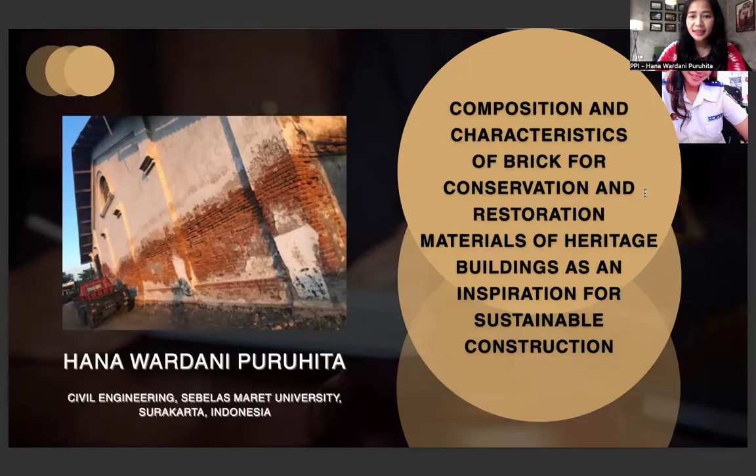I will present my research about the bricks, heritage bricks. The title of my research is Composition and Characteristic of Brick for Conservation and Restoration Materials of Heritage Building as an inspiration for sustainable construction.

Heritage buildings are buildings that have national, historical, and cultural value that are important for the understanding and development of science and culture in the world. So they need to be preserved and managed well. In Indonesia, the Republic of Indonesia Law Number 11 of 2010 concerning cultural heritage was issued.

Article number 77 states that the restoration of damaged cultural heritage buildings and structures is carried out to restore their physical condition by repairing, strengthening, and preserving them through reconstruction, consolidation, rehabilitation, and restoration work, which must take into account, number one, the authenticity of the materials, form, layout, style, and construction technology.

The second is the original condition with the least possible degree of change. The third is the use of non-destructive techniques, methods, and materials. And the last is the competence of the implementer in the field of restoration.

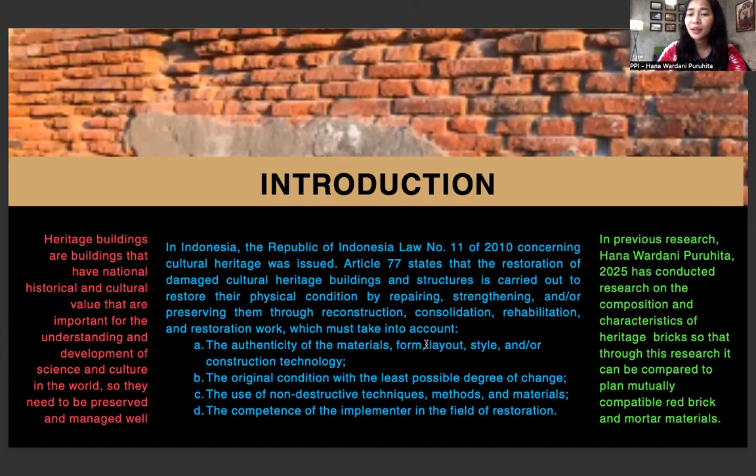In previous research, Hana Wardani Puruhita conducted research on the composition and characteristics of heritage bricks, so that through this research it can be compared to plan mutually compatible red brick and mortar materials.

The method of my research is, first, renewable bricks are made from the best material from various areas in Indonesia, particularly Central Java and East Java, with a minimum of 8 locations, including clay and lime. Renewable brick production is carried out at one of Indonesian brick production facilities to ensure complete equipment and support by

experienced personnel. Laboratory research location: brick characteristic test, laboratory of the Faculty of Civil Engineering, Sebelas Maret University Surakarta, Indonesia; brick composition test, integrated laboratory, Sebelas Maret University Surakarta, Indonesia. Research tools: the tools used are square rulers, calipers, a compressive strength machine, and a practical tool for mathematics and natural science material. Research type and design is laboratory test and experiment.

Research variables: heating temperature is a dependent variable, heating time is a dependent variable, and brick composition is the independent variable. And the last, the analysis technique: heritage bricks that have been lab tested for compressive strength, water absorption, salt content, and physical form are used as a reference in the experimental process of producing renewable bricks.

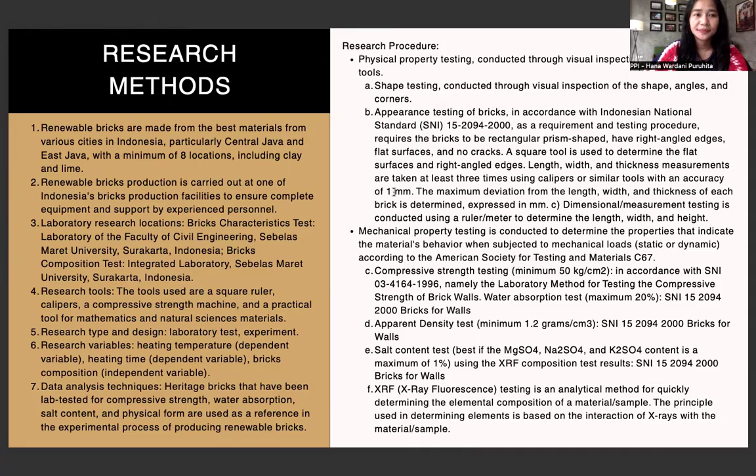And the result is the character of repair brick. Number one is reference data for repair bricks from Hana in 2025. The characteristics of repair brick refer to the physical and mechanical properties of the heritage brick material studied, namely physical properties and mechanical properties.

The physical properties of repair bricks may be based on the physical properties of heritage bricks, namely the shape is a rectangular cube and the dimensions vary for each building and region. Average dimensions are 5.5, 14, 25.5 centimeters. The surface is flat. Angularity is a 90 degree angle. Angularity is sharp.

Appearance color is average of number 2 and 5, and I will give the coloring number, and then conduct a pilot test by taking into account the additional dimension during the manufacture of the solid bricks mold, then calculate the shrinkage rate. The second is mechanical properties.

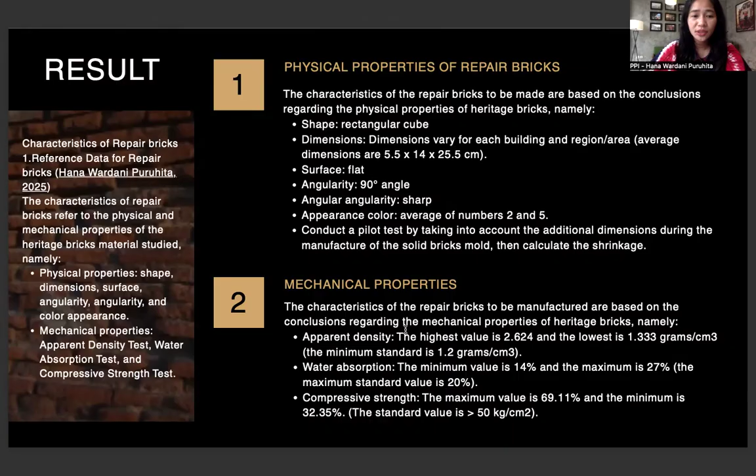2.6 and 1.3. And then the result of number 3, the process of methods: raw materials, pure clay, and then clean water; material processing, soak the clay in clean water for several days, etc.; molding the materials, drying the materials, firing the materials, and final research.

And the result, we can see we have a box for bricks from the wooden mold, make a wooden mold like that. The dimension is 5.5, 14, and 25.5 centimeters.

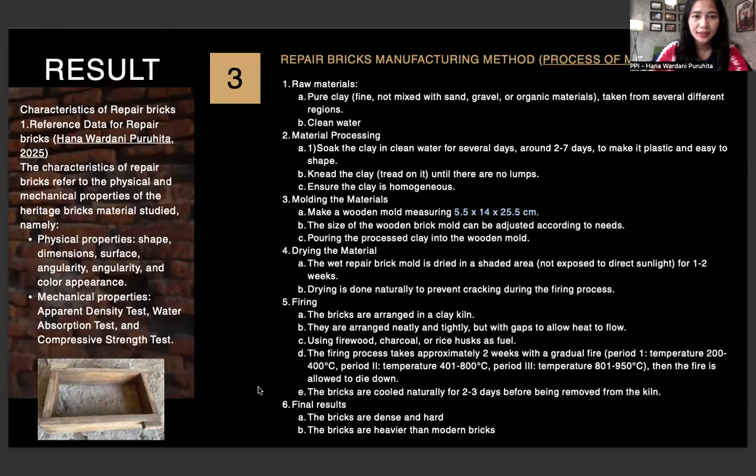And the results, location for selecting clay samples from Karangmalang District, Masaran District, Mojolaban District, Barat District, Jiwan District, Laweyan District, Jaten District, Kedunggalar District. Bricks from different locations have different results, and many bricks have different dimensions because the material is different from many regencies, East Java and Central Java.

So when we get the soil material from different regencies, we have different results. We can see number 1 until 8. Number 7 is the best dimension, the same as the wood.

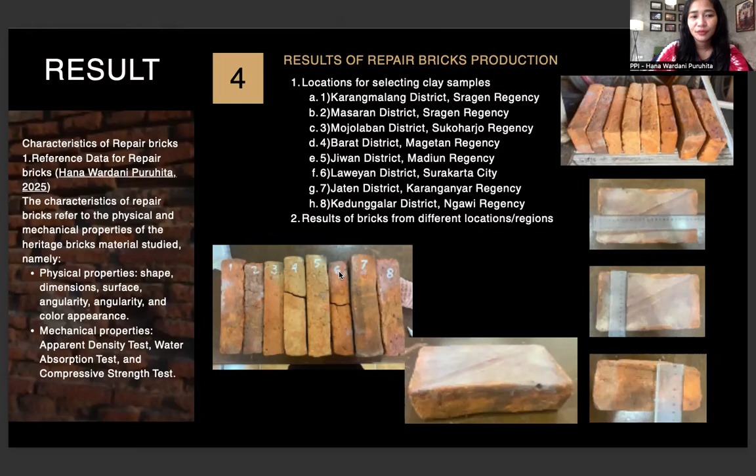Okay. And then physical properties, we can see the color of number 1 until 8. And we have the results for color, shape, dimension, surface, angle, and sharpness. Brick number 1, 2, 3, 4, 5, 6, 7, and 8 have different results of physical characteristics. The shape is all the same, rectangular cube.

And then the dimension is different because of the different materials. We can see number 1 until 8 have different dimensions, and then the surface is all the same, flat, and the angle is all the same, elbow 90 degrees, and then the sharpness is the same, sharp, and the color is different.

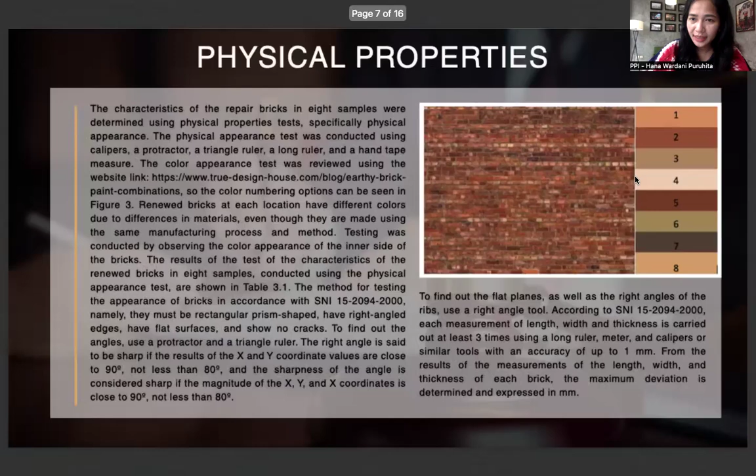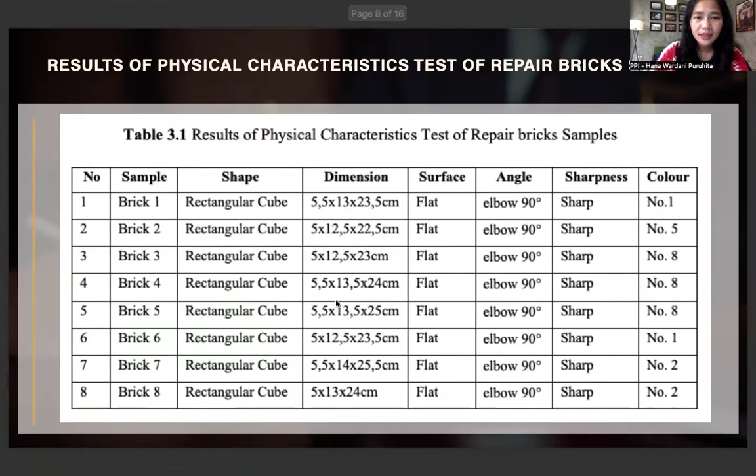Okay. Next, the conclusion of the physical characteristics: based on the visible test result, it can be concluded that from the test of the characteristics of repair brick in terms of physical properties, all repair bricks are rectangular cube shape with different dimensions, even though the materials are from the same region or from different regions.

The dimensions of the repair bricks vary, but there is one brick whose dimension meets the wooden mold, only one, namely brick number 7. All surfaces are flat, 90 degree angles, and sharp corners. Repair bricks have different colors. In the test, 100% of bricks are intact and meet the visible properties test according to SNI 15, Standard National Indonesia.

And the result of the brick size test doesn't meet SNI due to difference in size or dimension in heritage bricks, and there is a shrinkage value seeing the age of heritage bricks.

But brick number 7 is a brick made from clay in the Jaten Karanganyar area with clay conditions that have been left for a long time, namely more than 1 year. Making repair bricks with the same material specification as number 7 doesn't require additional dimension to the mold because there is no shrinkage in size in the resulting repair bricks.

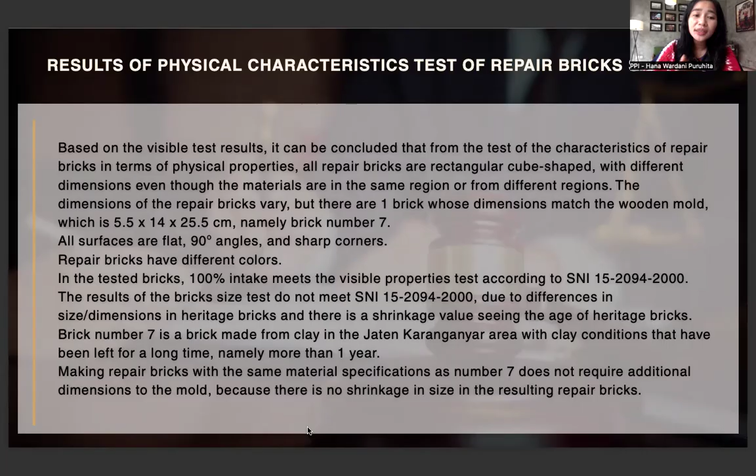So the result of physical characteristics: when we want to get the same size as the wooden mold, we must use the material from Karanganyar, Jaten. Why? Because of the clay condition, it has been left for a long time, namely more than 1 year.

And then mechanical properties, we can see many tests we have. The characteristics of heritage bricks in 10 samples were determined using mechanical properties tests conducted in the civil engineering laboratory, including apparent density test, water absorption test, and compressive strength test, namely ASTM. The results of the heritage bricks' mechanical properties were taken from 3 samples at each location, as shown in tables 3.2, 3.3, and 3.4.

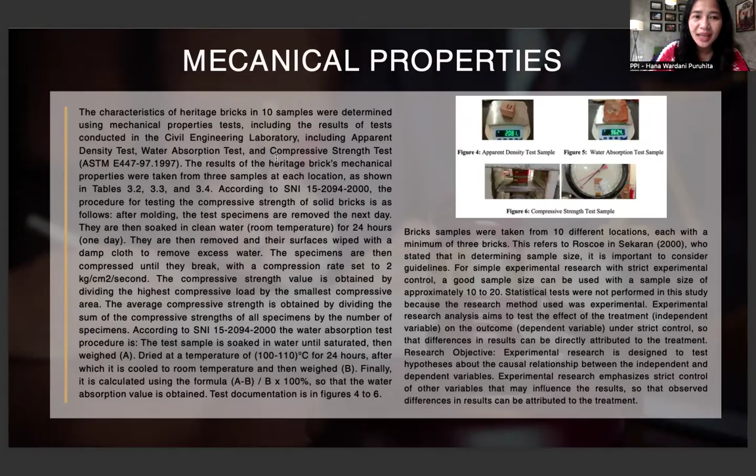And in figures 4, 5, and 6, we can see the tests for apparent density, water absorption, and compressive strength. We can see the results in the table. The apparent density test result for all heritage brick samples meets the requirement of SNI, which is a minimum of 1.2 grams. The highest value was 2.9 and the lowest was 1.7. So we can see at table 3.2 the many samples.

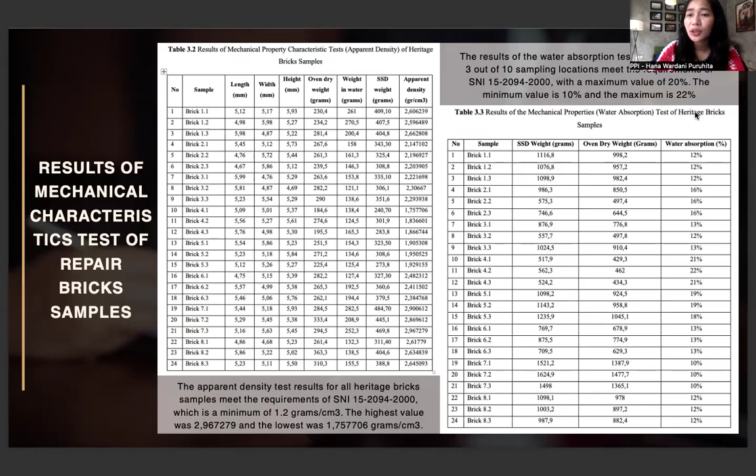And then table 3.3 shows the result of the water absorption test on heritage bricks. 3 out of 10 sampling locations meet the requirement of SNI, with a maximum value of 20%. The minimum value is 10 and the maximum is 22%. And then the last test, the compressive strength test result for repair bricks shows 100% of the values meet the requirement of SNI, with a value of more than 50 kilograms per centimeter.

All good. Based on the test results, it can be concluded that the mechanical properties of repair bricks, namely water absorption, apparent density, and compressive strength, show that all repair bricks have varying values even within the same area. The highest apparent density was 2.96 grams for brick 7. The lowest water absorption was 10% for brick 7, and the highest compressive strength was 86.7 kilograms per centimeter for brick number 7.

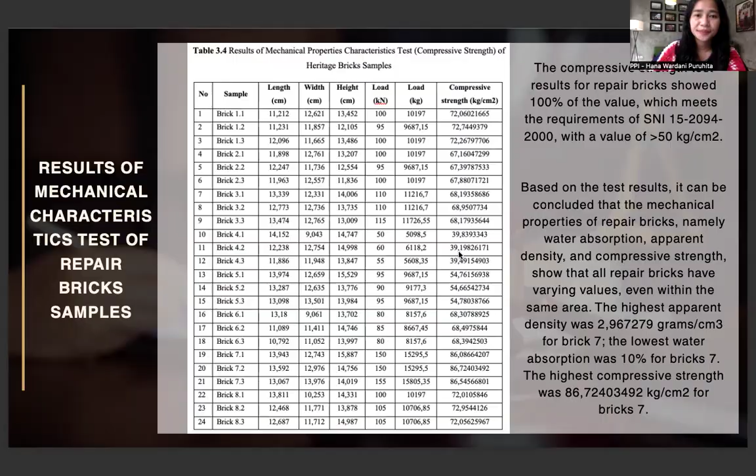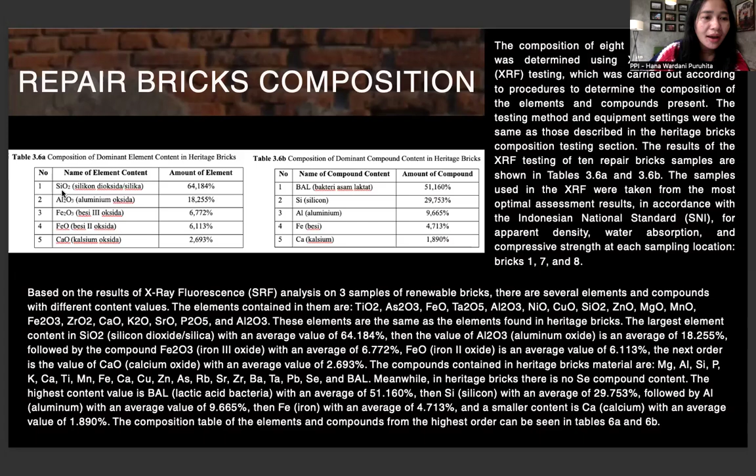Repair brick composition: we can see at table 3.6 the composition of dominant element content and the composition of dominant compound content in table 3.6b. Based on the results of XRF analysis on 3 samples of renewable bricks, there are several elements and compounds with different content values. The element contents are as in the table. First, from the dominant element content, silicon dioxide, Si, O2, as we can see in the top table.

And the conclusion. First, from the results of the heritage brick characteristic tests in terms of physical properties, renewable bricks are rectangular in shape with varying dimensions even within the same area. There is one brick with dimensions that match the mold, made of clay that has been left for at least 1 year. All surfaces are flat, sharp angles, and sharp corners. Renewable bricks have different colors even within the same area, with an average of color numbers 1, 2, and 8. In the brick test, 100% meet the visible properties test according to SNI.

The results of the brick size test don't meet SNI due to differences in size or dimension, as renewable bricks are adjusted to heritage bricks. Therefore, to make good renewable bricks, good clay material is needed, namely left for at least 1 year, with the characteristic of a whiter color.

And second, based on the results of testing the mechanical properties of renewable bricks, namely water absorption, apparent density, and compressive strength, all renewable bricks have different values even within the same area. The highest apparent density is brick 7 with an average value of 2.96 grams, while the lowest water absorption is brick number 7 with a value of 10%, and the highest compressive strength is brick number 7 with a value of 86.7 kilograms per centimeter.

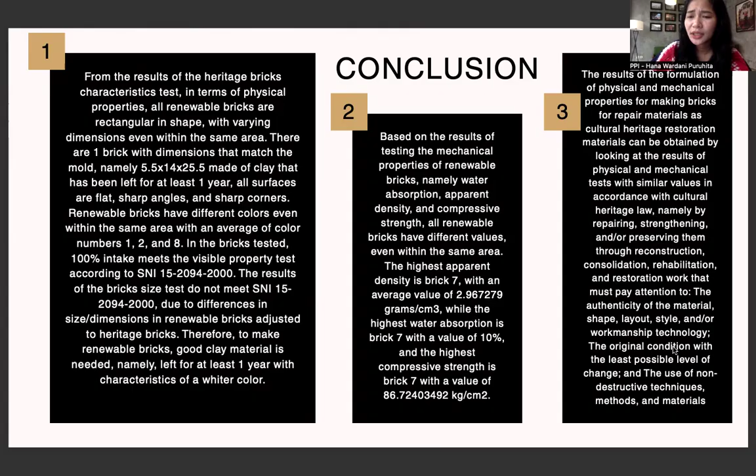And the last, the formulation of physical and mechanical properties for making bricks as repair material for cultural heritage restoration can be obtained by looking at the results of physical and mechanical tests with similar values, in accordance with cultural heritage law, namely by repairing, strengthening, and preserving them through reconstruction, consolidation, rehabilitation, and restoration work that must pay attention to the authenticity of the material, shape, layout, style, and workmanship technology, the original condition with the least possible level of change, and the use of non-destructive techniques, methods, and materials.